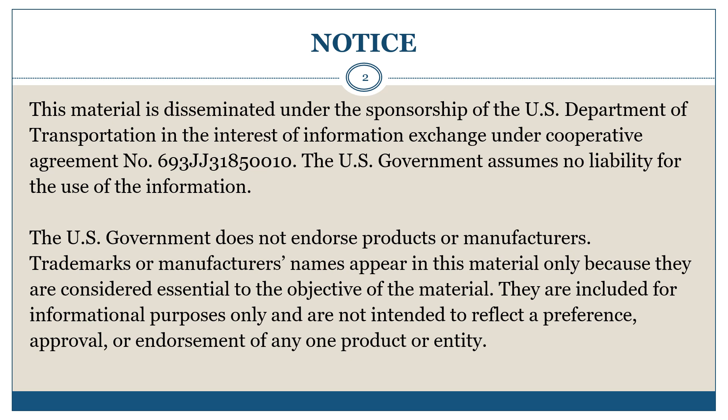This presentation is arranged in 5 sections corresponding to the selected major headings of the Companion Resource Responsible Use of Recycled Tire Rubber in Asphalt Pavements Technical Report.

First, a brief introduction will be presented, followed by a section of background information. Section 3, Specifications and Testing of GTR Modified Asphalt Binders, discusses binder specifications applicable to the wet process GTR Modified Asphalt Binders with respect to current AASHTO M320 and AASHTO M332 performance grade specifications. Dry process GTR Modified Asphalt mixtures are discussed based on mixture testing schemes such as the Balanced Mixture Design BMD approach.

Section 4, Asphalt mixture considerations are discussed with respect to expected performance of wet process and dry process GTR modified asphalt in 3 general mixture types: dense graded, gap graded, and open graded mixtures. Section 5, a summary, provides summary and comments and discussion.

First, a brief introduction.

Recycling is the process of converting waste materials into new materials or objects. It is an alternative to conventional waste disposal that can save material and reduce environmental impact. Recycling of rubber from waste tires is commonly referred to as recycled tire rubber or RTR. When used to modify asphalt binders and mixtures, it is referred to as ground tire rubber or GTR. Whether through binder or mixture modification, incorporation of GTR into asphalt pavements is an attractive alternative addressing engineering, economic, and environmental issues. The Federal Highway Administration established the FHWA Recycled Materials Policy regarding sustainable infrastructure in 2006.

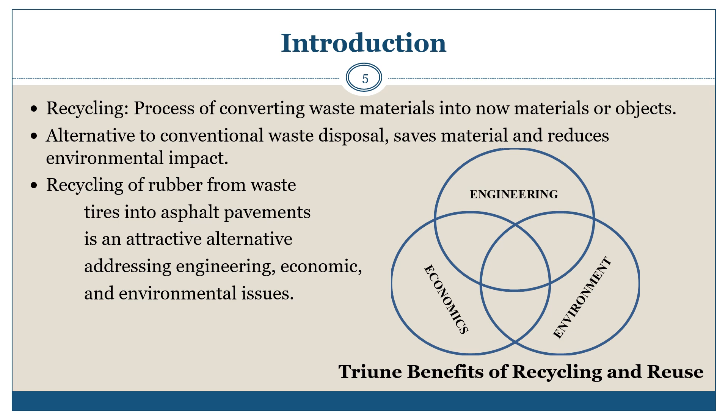The FHWA policy states that recycling and reuse can offer triune benefits of engineering, economic, and environmental impact. As stated, the Recycled Materials Policy regarding sustainable infrastructure was established by the Federal Highway Administration in 2006. The policy states that recycling and reuse can offer triune benefits of engineering, economic, and environmental impact. Comparatively, the American Society of Civil Engineers states that sustainability is made up of environmental, social, and economic needs referred to as the triple bottom line.

The primary objective of this report is to provide knowledge for resource responsible use of recycled tire rubber in production of asphalt pavements and to promote sustainable use of recycled tire rubber in asphalt pavements. Technical information is given on the background of recycled tire rubber use in asphalt pavements and information related to specifications and testing of GTR modified asphalt binders, as well as considerations for GTR modified asphalt mixture design.

This project is sponsored by the Federal Highway Administration Project Deployment and Development of Innovative Asphalt Pavement Technologies, specifically related to resource responsible use of materials in flexible pavement. An accompanying technical report entitled Resource Responsible Use of Recycled Tire Rubber in Asphalt Pavements is also available at the UNR website.

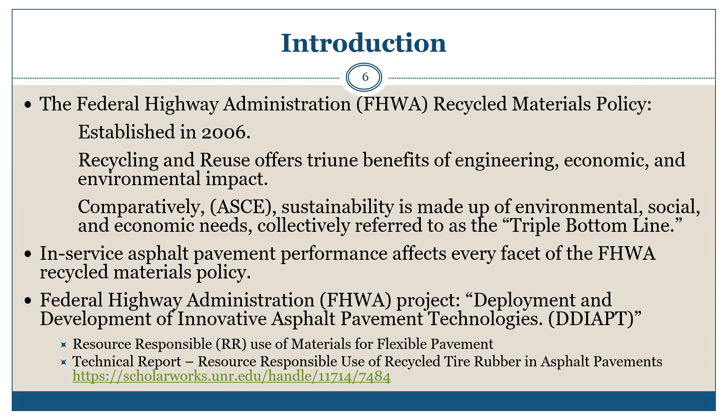Some brief background information.

This brief background discussion will be broken down into sub-discussions of tire components, waste tire issues, and a historic perspective of GTR usage in asphalt pavements, current usage of GTR modified binders and mixtures, rubber modified asphalt processing technologies, and a summary of these technologies.

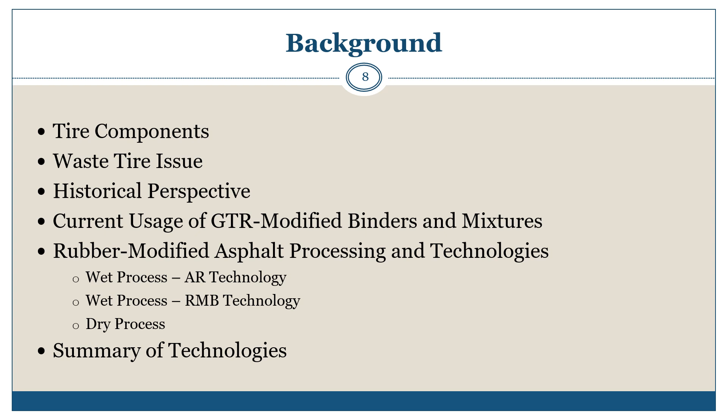Let's discuss typical tire components. Large amounts of polymers such as natural rubber and synthetic polymers such as styrene butadiene rubber or SBR, ethylene propylene diene monomer or EPDM rubber, and butyl rubber, collectively referred to as rubber, are used in production of pneumatic tires for passenger cars, trucks, and aircraft, among others.

The rubber makes up approximately 40+% of the total tire composition, with the natural rubber and synthetic rubber typically being used for tread compounds, the ethylene propylene diene monomer or EPDM used for sidewall compounds, and butyl rubber used as the inner liner of the tire due to its impermeability of air.

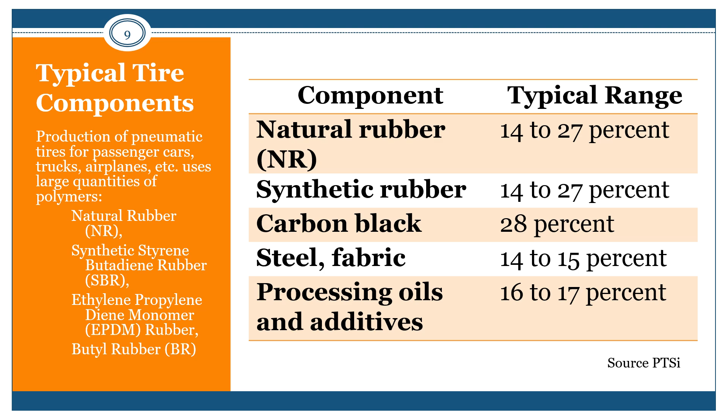Almost the entire amount of original rubber from waste tires is discarded, which necessitates a very long time for natural degradation. Disposal of waste polymers is a serious environmental concern as polymeric materials do not decompose easily. This poses two major challenges: waste of valuable rubber and environmental pollution due to disposal of waste tires.

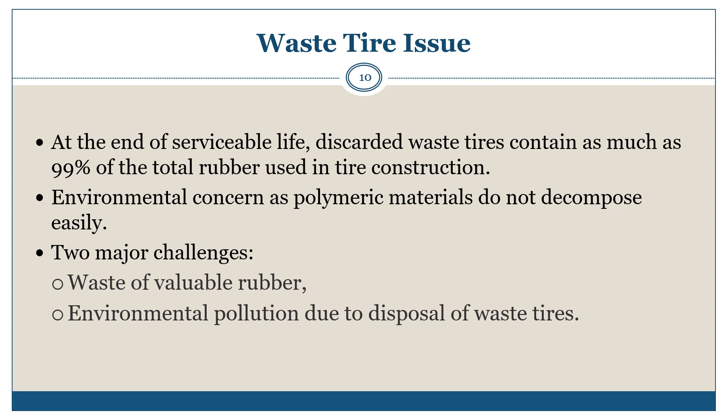In 2017, as reported in the accompanying technical report to this presentation, the U.S. Tire Manufacturers Association reported that markets for scrap tires were consuming just over 3.4 million tons, or 81.4%, of the estimated 4.2 million tons of scrap tires generated annually.

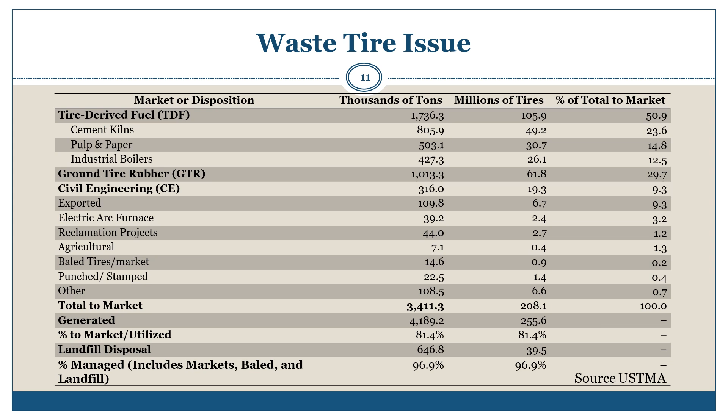The three largest scrap tire markets in 2017 were tire-derived fuel at 50.9%, consisting of cement kiln, pulp and paper, and industrial boiler applications; ground tire rubber at 29.7%, used in asphalt modification, automotive products, molded extruded products, playground and mulch, and sports surface applications; and civil engineering at 9.3%, including tire shreds used in road and landfill construction, septic tank leach fields, and other construction applications.

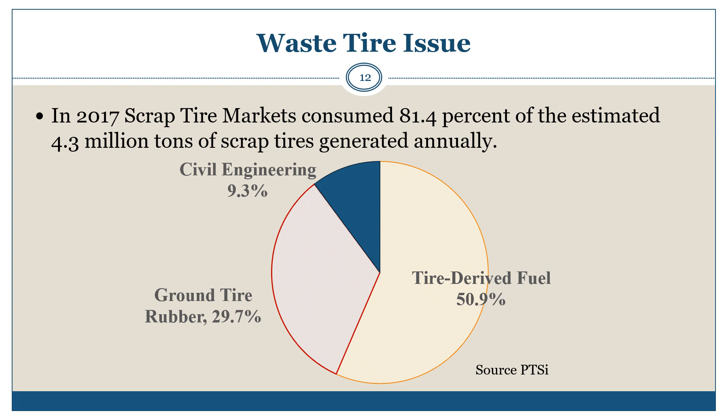Recycling of waste rubber from tires into GTR involves grinding, a reduction of the rubber into smaller particle size, which results in an increase of surface area. The rubber grinding industry classifies GTR according to the particle size as rubber which is 2.0 millimeters, ten mesh, and smaller. The typical sizes of GTR used in modified asphalt binders and mixtures for pavement construction range from about 1.5 millimeters, or 1,500 microns, down to 0.42 millimeters, or 420 microns.

That's about 14 mesh to 40 mesh, with limited use sizes as small as 177 microns, or 80 mesh, and 125 microns, or 120 mesh.

The GTR market is reported at slightly more than 1 million tons, or about 62 million scrap tires. GTR modified asphalt pavements represent 11.7%, or approximately 119,000 tons, 7.2 million scrap tires. This is the GTR share of the total GTR market, and this is the asphalt share of the total GTR market.

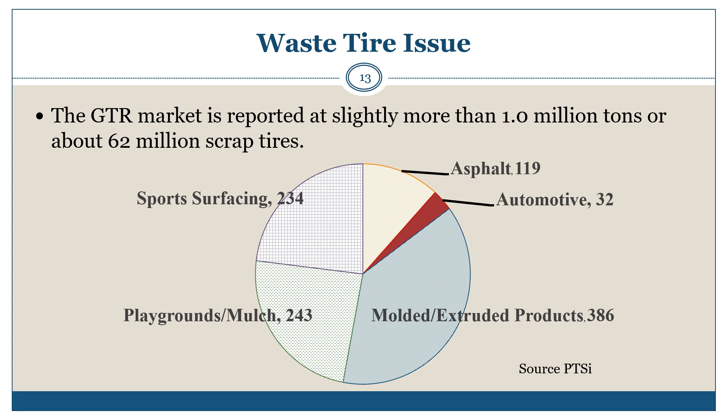Research on GTR modified asphalt binders over the last 50 years has shown favorable impacts of GTR modification. GTR ranks second among the most common asphalt polymer modifiers behind styrene butadiene styrene, SBS block copolymers. Modern GTR use in paving began in the early 1960s with a highly elastic asphalt rubber, or AR.

The work expanded into larger chip seal projects along with other crack relief interlayers and open graded friction courses. During the two decades following, AR materials increased as they proved useful in various pavement maintenance functional applications, including asphalt pavement. But by far the greatest utilization during this time frame was maintenance applications.

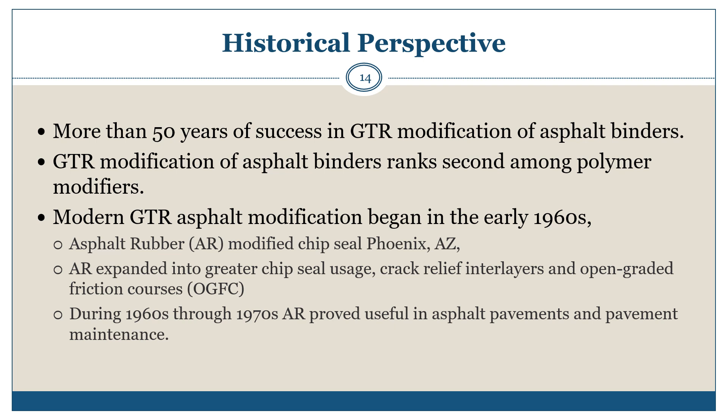During the same time frame, versions of dry mixture addition of GTR to asphalt mixtures posed more of an issue than dry processes employed today. These systems were collectively referred to as rubber modified asphalt concrete, or RUMAC, according to Dr. Mark Buncher in 1995.

The primary difference in the dry process technology of the 1960s and 1970s compared to today's dry process technology relates to GTR particle size and dosage, where in the earlier versions, ten mesh rubber was used at a loading of 3% by weight of the mixture.

And today, the mixtures consist of smaller size rubber of 30 mesh at about 0.5% by weight of the mixture. Additionally, co-additives that aid in mixing, placement, and compaction have been employed today. These additives have included processing aids from the tire manufacturing industry, Fischer-Tropsch waxes, and Steramid waxes.

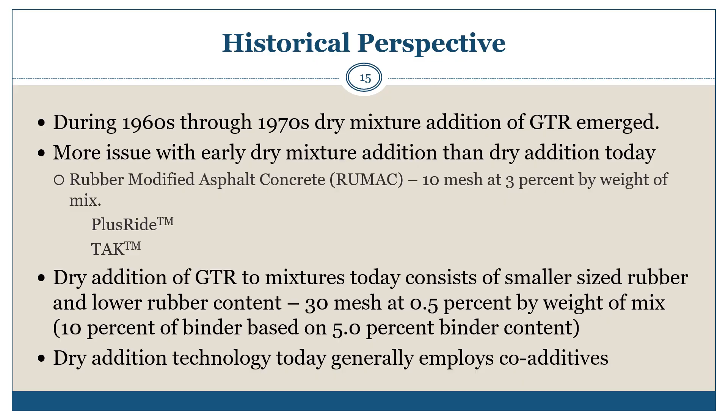As of July 2021, a review of state DOT published specifications revealed that only 12 states currently publish specifications allowing GTR modified asphalt binders for use in construction of asphalt pavements.

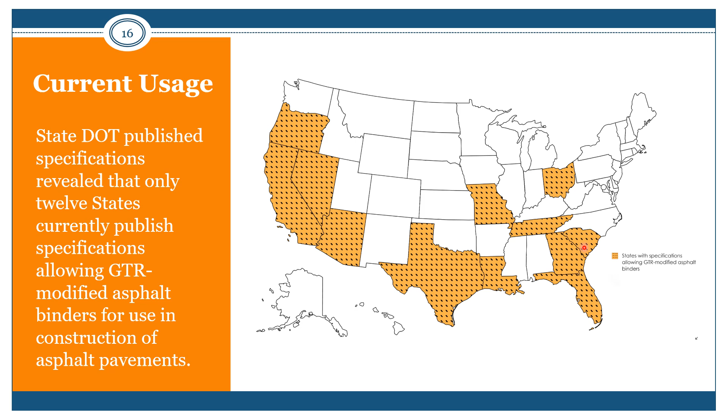The National Asphalt Pavement Association recently reported that 21 producers from 11 states indicated using GTR in some asphalt mixtures. The 20,000 tons of GTR used, reported by NAPA, is about 17% of the 119,000 tons of GTR reported by the U.S. Tire Manufacturers Association to be used in modified asphalt binders.

The NAPA report did not include use of GTR in surface treatments such as chip seals, which is a major source of consumption. NAPA reported that approximately 67% of the total asphalt mixture tonnage using GTR was in California, which mandates widespread use of GTR in asphalt pavements. This is not a federal requirement.

California is by far the largest user of GTR modified asphalt binder, with uses being directed by PRC 42703. The California DOT, Caltrans, requires that GTR be derived from automobile and truck tires only, that GTR binders be homogeneous, GTR modified binders may not contain visible rubber particles, and GTR modified binders contain a minimum of 10% GTR.

Arizona, the second largest user of GTR modified asphalt binders, has two different specifications. Crumb rubber modified asphalt, or CRA, consisting of GTR modified binders with 20% minimum GTR content produced using the AR technology, and PG graded AASHTO M 320 for hybrid GTR produced by rubber modified binder, or RMB technology, with a minimum of 8% GTR and 2% SBS.

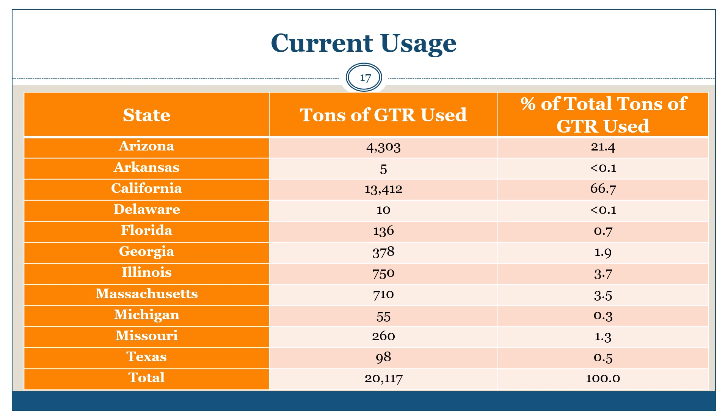The wet process blends GTR with asphalt with one of two technologies. It is done either on-site at the asphalt mixture plant, asphalt rubber, or at the asphalt binder supply terminal, rubber modified binder, with a prescribed minimum reaction time or minimum acceptance specifications prior to mixing the GTR modified asphalt binder with aggregates. The dry process incorporates GTR directly into the asphalt mixture during production, usually by adding the GTR directly to the aggregate in the asphalt plant mixing drum prior to introducing the asphalt binder.

These three technologies will be discussed in the following slides.

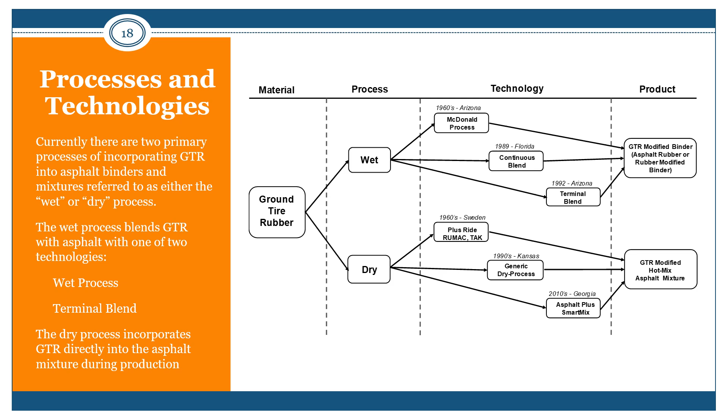Asphalt rubber, or AR, is defined here as an asphalt binder in various types of flexible pavement construction, including surface treatments and asphalt mixtures, consisting of blending asphalt binder, ground tire rubber, and certain additives in which the rubber component is at least 15% by weight of the total blend and has reacted in the asphalt binder sufficiently to cause swelling of the rubber particles.

Other names for this technology include, with appropriate acronyms, the McDonald process, Arizona crumb rubber, wet process rubber, recycled tire rubber modified bitumen, asphalt rubber binder, bitumen rubber binder, crumb rubber binder, and batch blending.

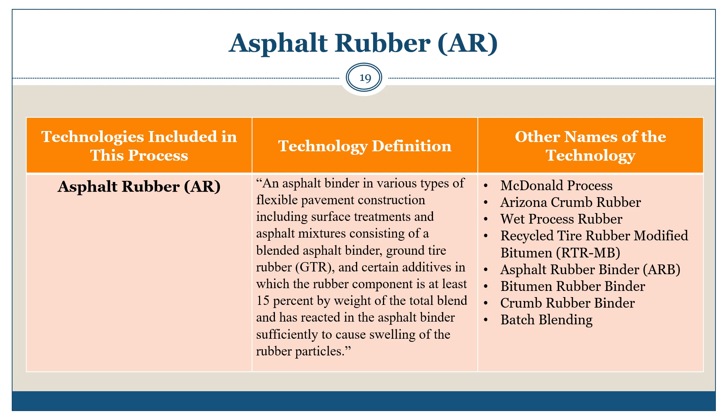Rubber modified binder, or RMB, is defined as a version of the wet process where ground tire rubber is blended with asphalt binder at the refinery or at the asphalt binder storage and distribution terminal and transported to the asphalt mix plant or job site for use. These blends may contain from 5 to 12% GTR by total asphalt binder mass.

Some hybrid RMB binders may contain polymers such as styrene-butadiene-styrene, SBS, in addition to GTR. Other names for this technology include, with appropriate acronyms, terminal blend, terminal blended rubberized asphalt, recycled tire rubber modified bitumen, rubber modified binder, hybrid rubber binder, and the Wright process.

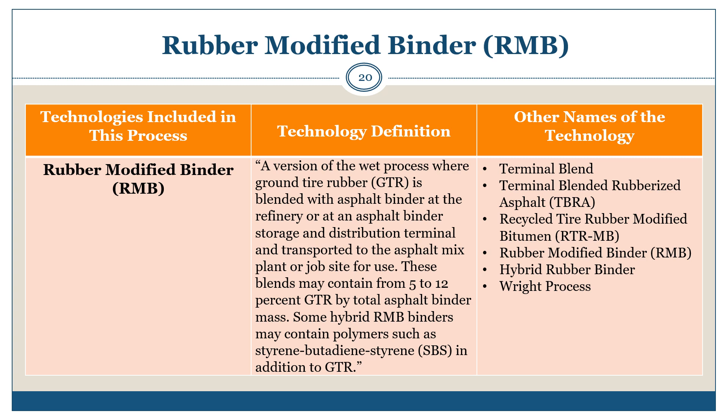Dry process rubber is defined as a process where hot mix asphalt mixture is modified with ground tire rubber using GTR as an aggregate/binder modifier, which is incorporated into the aggregate prior to mixing with asphalt binder, producing a GTR modified hot mix asphalt mixture. GTR used in this technology is generally less than 0.6 millimeters or 30 mesh.

Other names for this technology include, with appropriate acronyms, dry process rubber and belt add modifier.

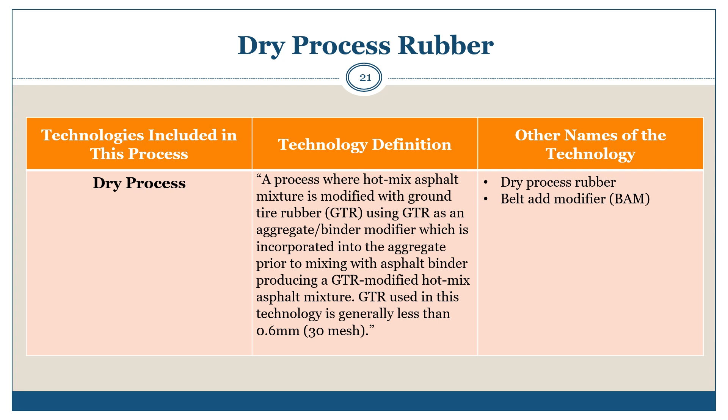Agency specifications may vary in format but generally have common components describing the type of product or process, materials, construction requirements, method of measurement, and basis for payment. Acceptance specifications for GTR modified asphalt binders primarily include test results to characterize stiffness of the asphalt binder with respect to expected end use conditions, complemented by tests to ensure safety, consistency, and retention of properties with aging.

Separation or settlement of GTR from asphalt during storage is a common concern. This is primarily due to issues with buildup of GTR in storage tanks with intermittent or sporadic use of GTR modified binders. Precautions and measures can be used to reduce or eliminate settlement issues.

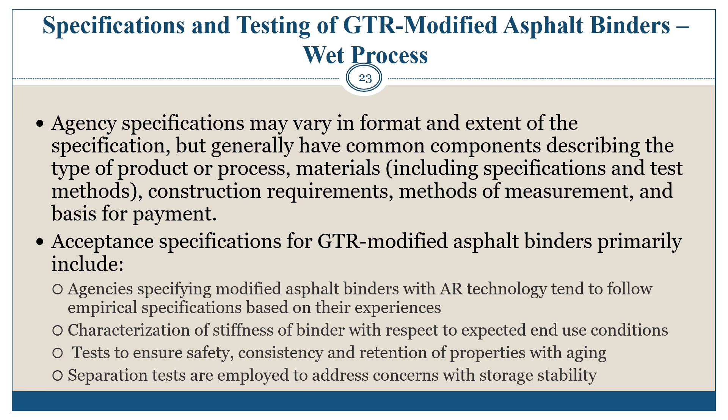Specifications and testing of wet process GTR modified asphalt binders. AASHTO standard specification M320 and M332 may be employed for wet process GTR modified asphalt binders. Modifications to dynamic shear rheometer methods, such as increased gap and concentric cylinder geometries, have been used to address GTR particle size effects. Increased gaps and alternative geometries allow adherence to the standard specification.

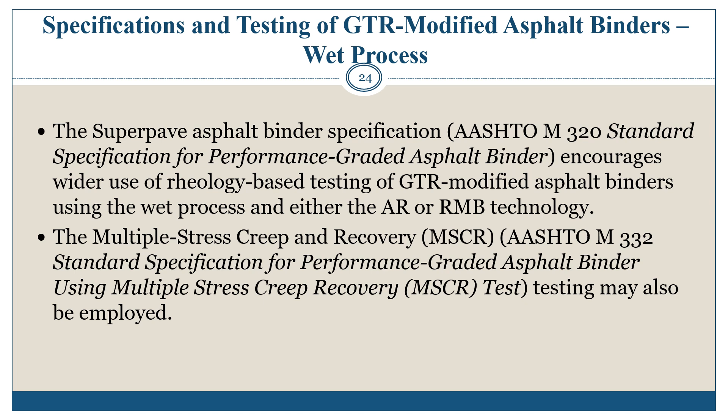Specifications and testing of dry process GTR modified asphalt mixtures. Specifications and certification of dry process GTR modified mixtures is not as straightforward as with the wet processes. While some agencies have specified binder be extracted from mixtures for subsequent binder testing, there are concerns with this practice.

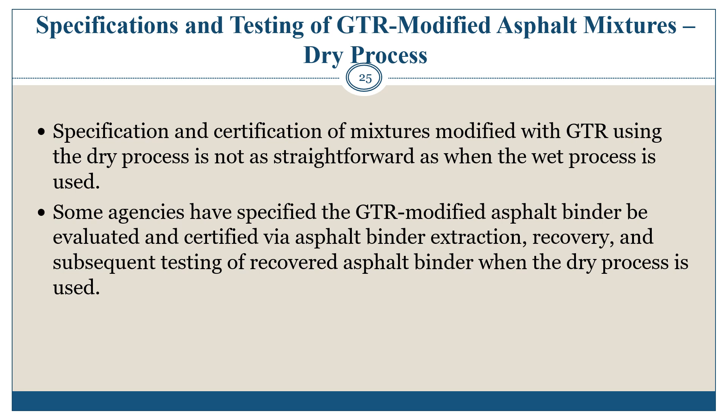Two concerns are posed with testing of extracted binder from GTR modified mixtures. One, is the GTR totally recovered from the mixture along with the asphalt binder? GTR is not totally soluble in any solvent due to SBR content. Two, does solvent extraction aid in better incorporation of the rubber and asphalt compared to actual field performance? Balanced mixture design, or BMD, mixture testing schemes may be more appropriate for evaluation of dry process rubber modified mixtures.

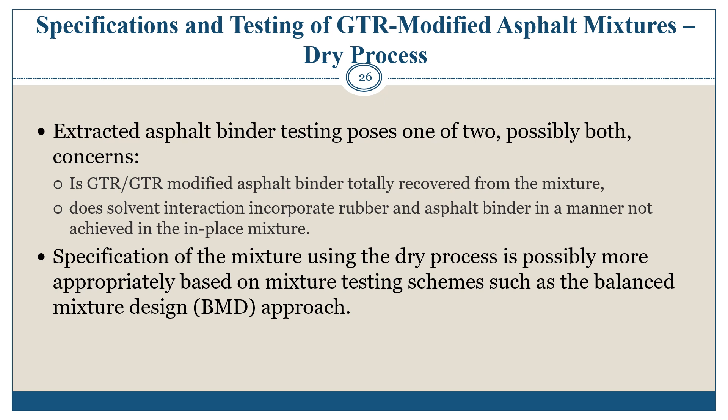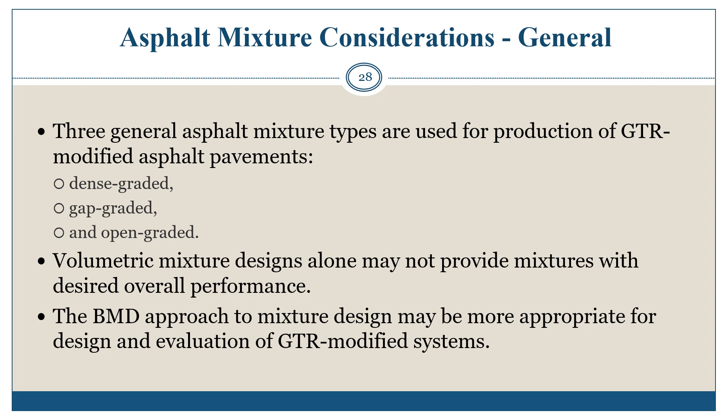Asphalt mixture considerations for wet process dense graded mixtures. The three common mix design methods, Marshall, Hveem, and Superpave, have been used to design dense graded mixtures with GTR modified binders. In dense graded mixtures, GTR modified binders generally increase optimum binder content and lower laboratory stability compared to conventional asphalt dense graded mixtures. This is generally a result of AR binder, or in the case of RMB, having a higher viscosity relative to conventional asphalt binder, preventing close packing of the aggregate, thereby needing more binder to get the same level of voids in the total mixture, or VTM.

Use of AR binders with higher GTR concentrations of 15 to 20% is not common in dense graded asphalt but may occur. GTR used in dense graded mixtures is typically in the form of AR binders with reduced GTR content, less than 10%, or RMB technology of similar GTR concentrations.

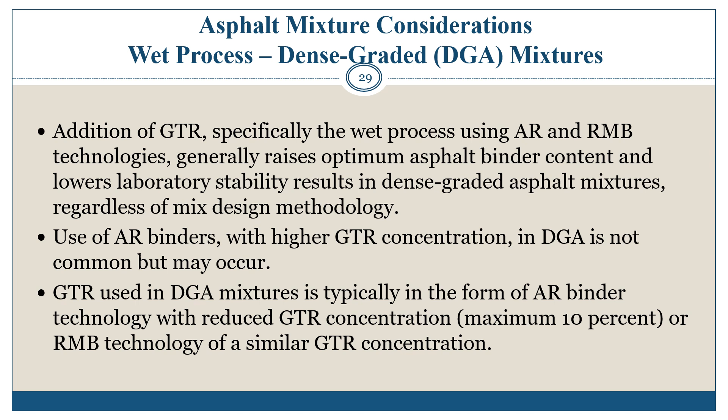Asphalt mixture considerations, wet process for gap graded mixtures. The three general mix design methods, Marshall, Hveem, and Superpave, have been used for gap graded mixture design. Gap graded mixtures are generally used with AR technology in place of dense graded mixtures. GTR concentrations may be in the 15 to 22% range. Gap grading generally consists of removing a portion of the fine aggregate to allow room for rubber particles within the gradation. Typical binder contents of gap graded mixtures are in the 6 to 8% range.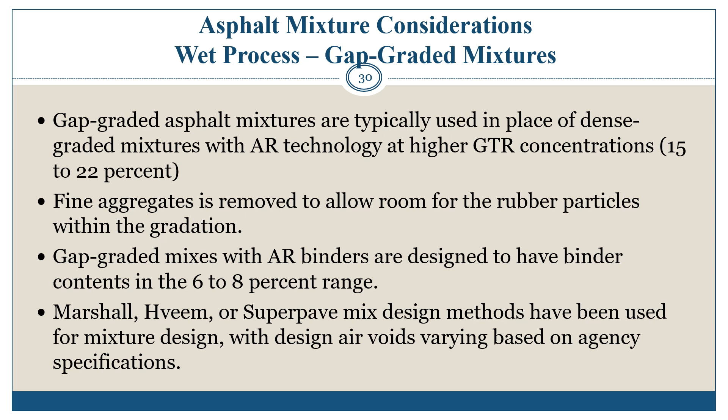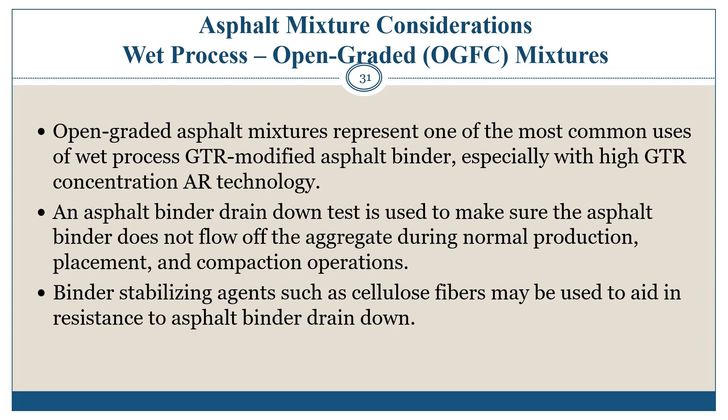Asphalt mixture considerations for wet process open graded friction course mixtures, or OGFC mixtures. Open graded asphalt mixtures are more common with wet process GTR modified asphalt binder, particularly with AR technology. A common test for OGFC and SMA is binder drain down, to ensure that binder does not flow off the aggregate during normal production, placement, and compaction. Stabilizing agents are often used to aid in resistance to asphalt binder drain down. Sometimes warm mix additives may be used with GTR modified systems, allowing lower temperature, which aids in prevention of drain down. It is important to consider the contribution of binder stabilizing agents to mixture durability before foregoing use of these stabilizing agents.

Asphalt mixture considerations for the dry process. Dry process GTR modified asphalt mixtures have been designed using standard mix design methods. Criteria for selection of optimum asphalt binder content may be different than typically used in these methods. Laboratory designed mixtures are prepared by pre-blending heated dry aggregates and rubber, followed by addition of the asphalt binder. Laboratory stability and stiffness values of dry process modified asphalt mixtures have been reported to be lower than values of conventional mixtures.

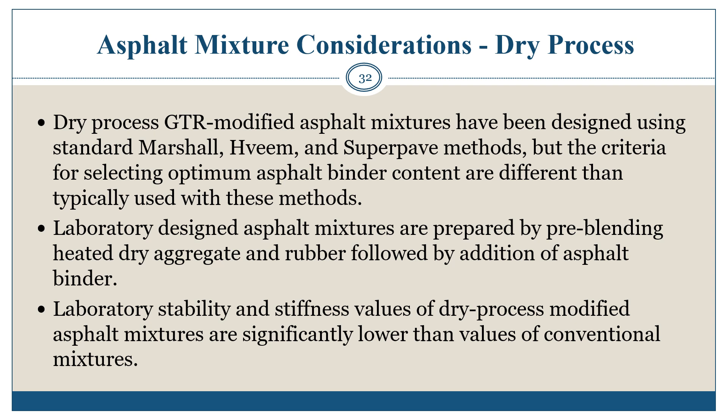Summary and discussion. There are several common repurposing methods to effectively reuse recycled tire rubber. As seen, recycling of rubber from old tires includes the three largest scrap tire markets of tire-derived fuel, ground tire rubber, and civil engineering applications. GTR is the second highest consumer of recycled tire rubber, with uses in several applications including asphalt binder and asphalt mixture modification for asphalt pavement construction.

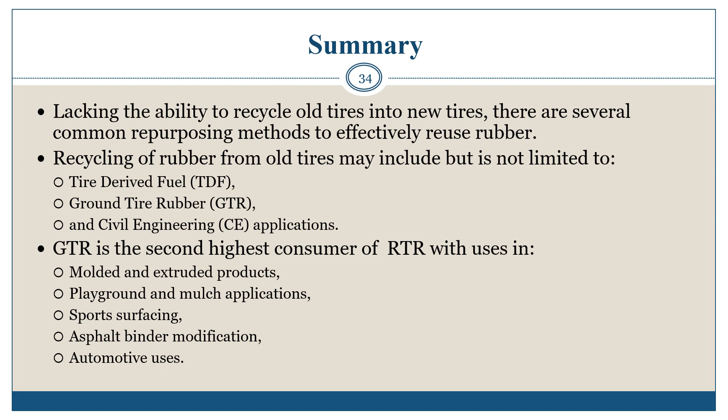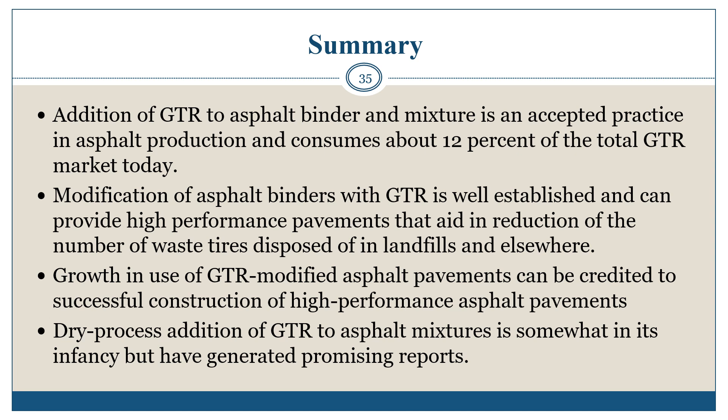As an accepted practice of asphalt production, GTR modified asphalt binder and GTR modified asphalt mixture consumes about 12% of the total GTR segment of the recycled tire rubber market. Asphalt modification with GTR is well established and can reduce the number of waste tires disposed of in landfills while providing high-performance pavements. Growth and use of GTR modified asphalt can be credited to construction of high-performance asphalt pavements. Dry process addition of GTR to asphalt mixtures, while it is in its infancy, has generated promising reports.